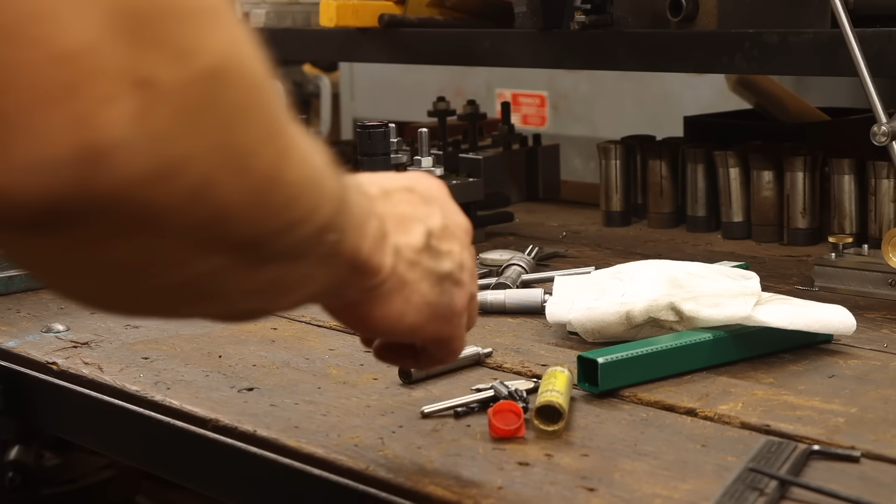Clutter is the absolute bane of my existence. Having stuff scattered about has the same effect as a persistent itch that just won't go away. It's obnoxiously distracting. After nearly a year of sorting, organizing, and labeling this shop, I have more or less eliminated all the clutter from my working areas, which makes this shop a real delight to work in. But now I've spoiled myself, and I want that clean simplicity in other areas of my life.

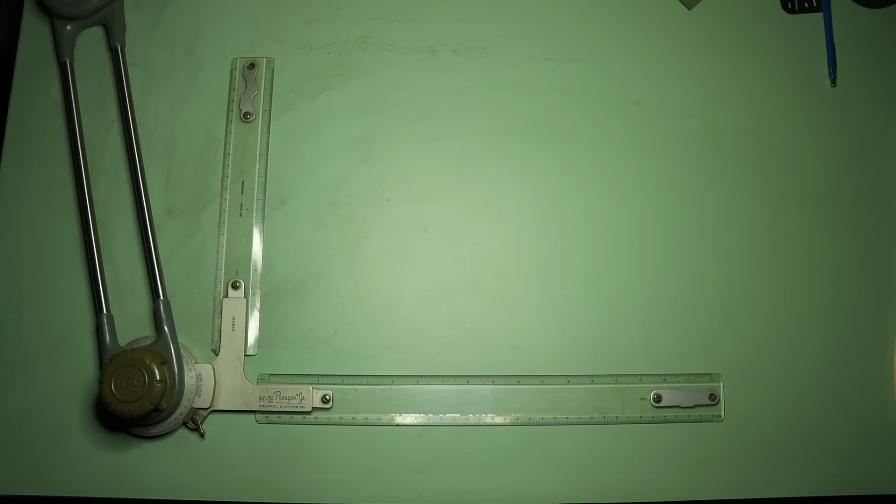Like any good machining project, I'll need a good drawing to go by. So let's jump right into the design. There are a lot of ways this build could go, but the only real requirement will be that it must fit the dimensions of a common credit card or ID.

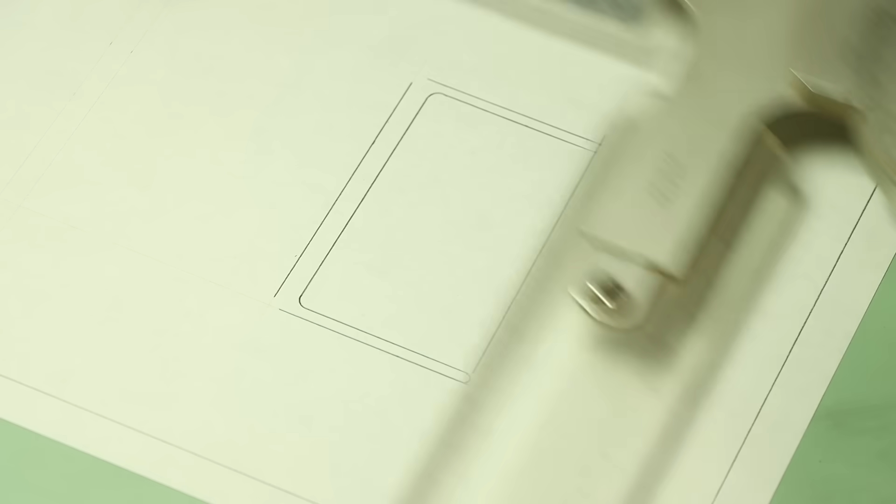I'm going to go for what I guess you could call a four-sided design, meaning the wallet will enclose 4 of the 6 sides of the cards, 3 edges and 1 face. So the outside dimensions will need to be a bit larger than the cards themselves to form the walls of the wallet. A holding capacity of a maximum of 5 cards should cover my needs, so that will define the depth of the card pocket and the overall thickness.

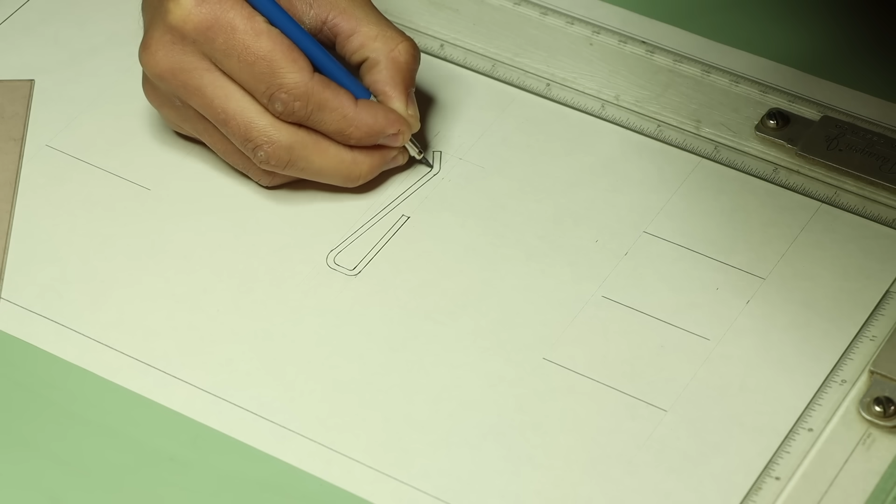To hold everything secure in the wallet, I'm going to include an integrated money clip. The springiness of the clip will keep the cards safely seated in the pocket, but also give flexibility to hold down a little cash. You know, just in case I stumble into some sort of machinist garage sale, or something.

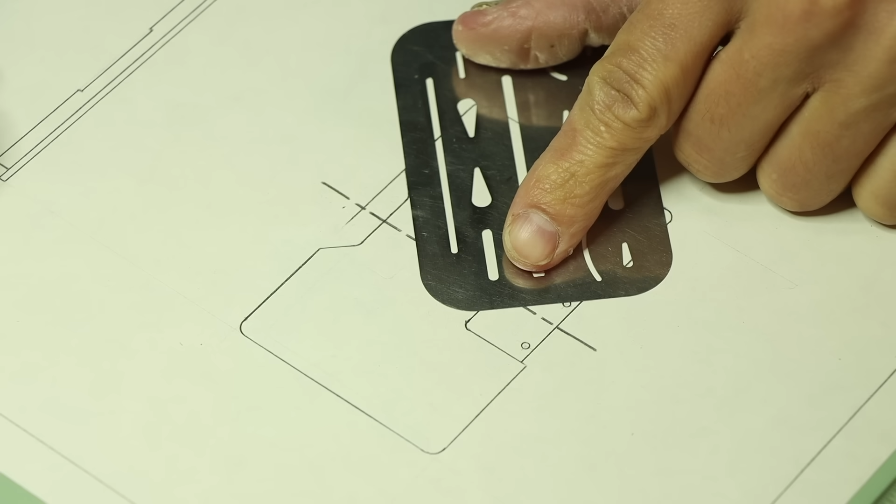The clip will wrap around the back side of the wallet, where I'll anchor it with some 2-56 button head screws. I'll remove the material where the clip is mounted to bring it flush with the outside surface and keep everything looking clean, and also add a little cutout to aid in grabbing the contents.

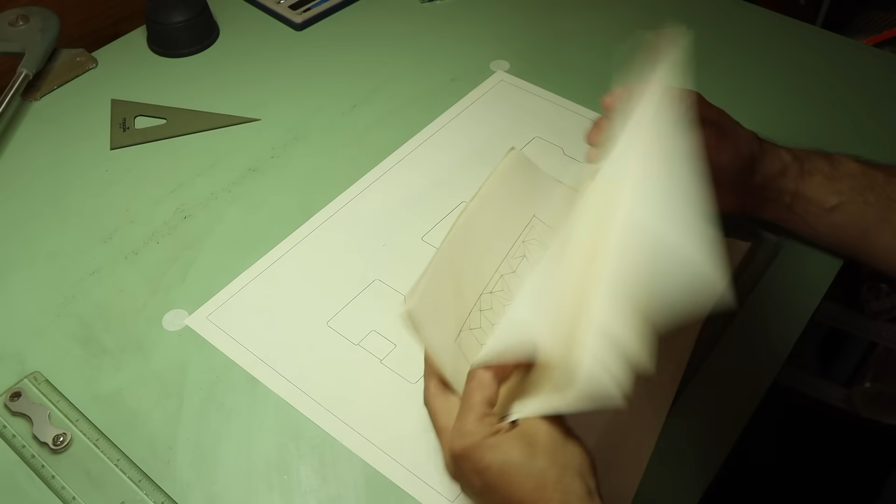With all the functional aspects covered, I can move on to the part I've really been looking forward to. I have this whole backside that is a literal canvas just begging for some creative expression. I'd like to engrave some sort of geometric pattern on here, but I'd also like for it to be a little bit of a challenge.

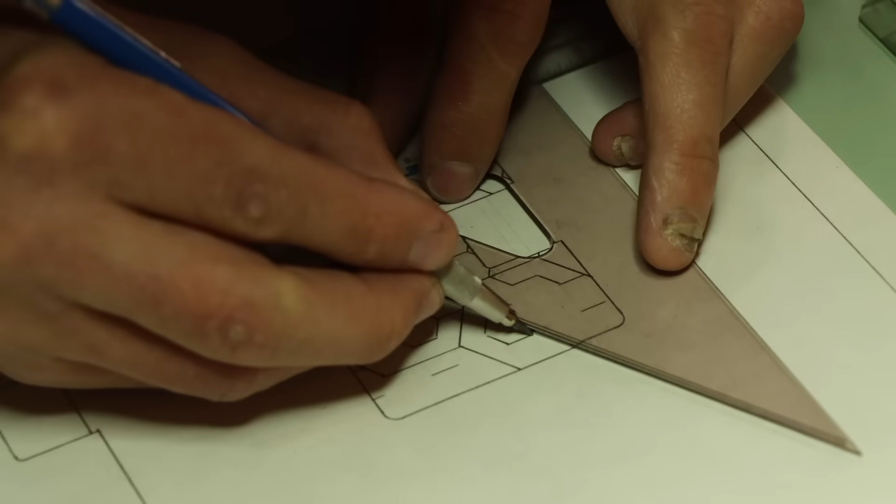After quite a bit of doodling and playing around with different concepts, I've settled on whatever you would call this. I don't know what it is, but I like it. And I think I'll be able to manage the machining with some clever dimensioning and fixturing.

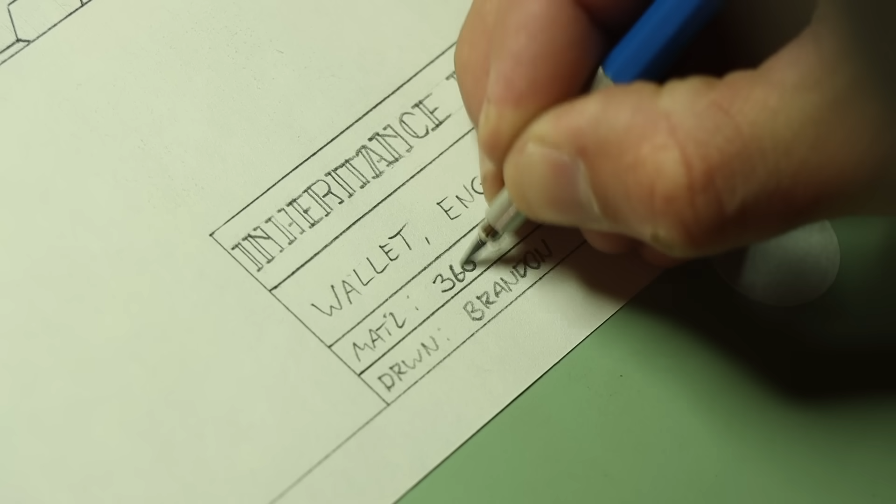I think. The setup I have in mind requires a fair bit of calculation ahead of time, as well as a couple changes in coordinate systems. I'll go over my thinking here when we tackle that part, but just know, it's not as bad as it looks. And since this is a project where looks will be important, material selection cannot be overlooked.

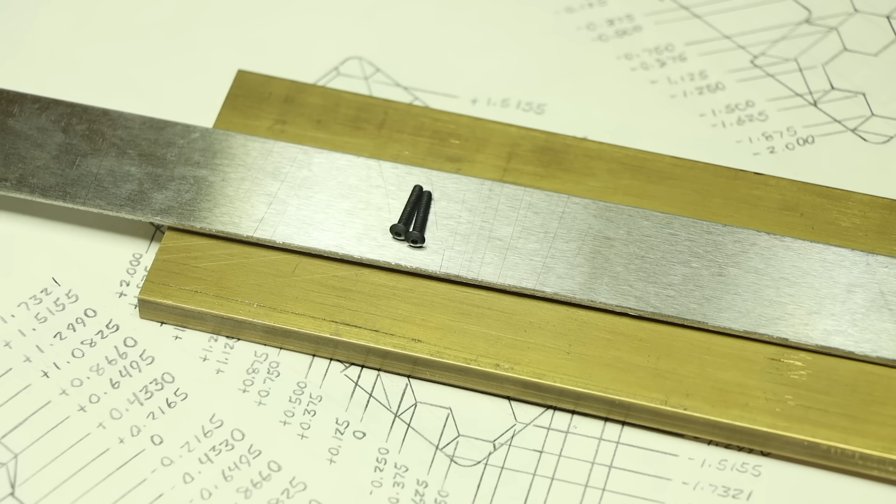I'm going to go with a 360 brass for the body and 304 stainless for the clip. I think the combination of the yellow, gray, and black of the hardware is going to look frickin' sharp, and I can't wait to get started.

Actually, I don't have to wait at all. It's time to machine. Just not on the project. There are a few things I need to get in line before I can really start. Some might even call these side projects.

The way I envision this going, I will be making heavy use of the rotary table. So first things first, I need to get this laid down and trammed square with the mill. I also expect to be bouncing back and forth between the rotary table and the vise, so I'll get this mounted and trammed as well. It's a little crowded, but I think this will work fine.

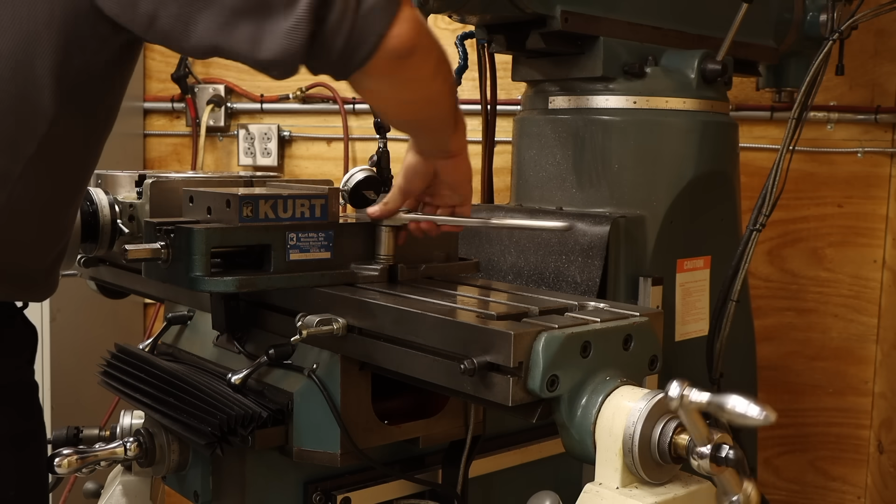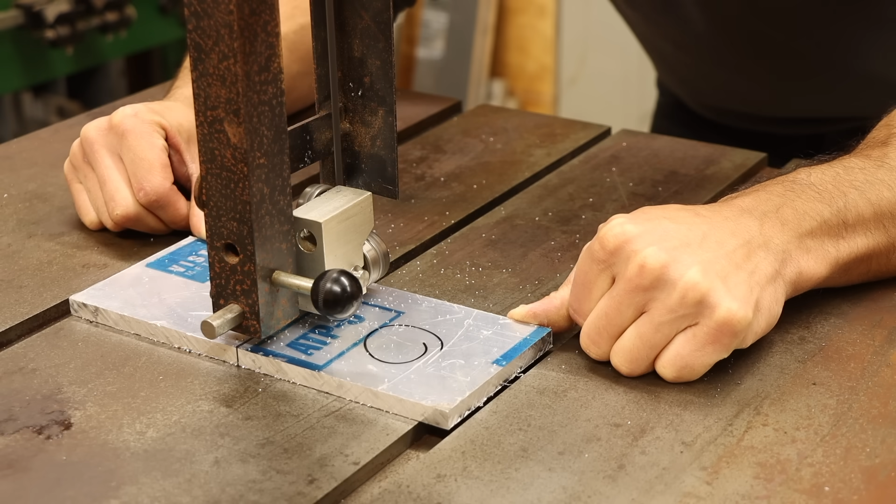Okay, now for stage 2. I'm going to need a way to accurately hold and locate the wallet at the center of the rotary table, which means I'll need a fixture plate. It just so happens that I have some 5083 aluminum tooling plate that would be perfect for this. My understanding is that this material has been stress relieved and precision ground, which should mean it will be very dimensionally stable during machining. Probably not absolutely necessary for what I'm doing here, but I've got it, so why not?

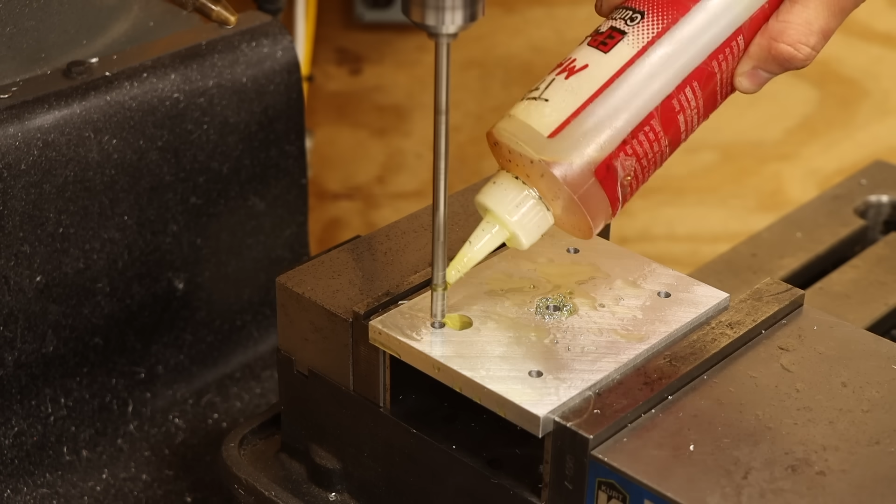After milling the sides all square, I can move on to drilling and reaming the various holes that will help me locate this plate on the rotary table. The locations of these holes will make sense shortly.

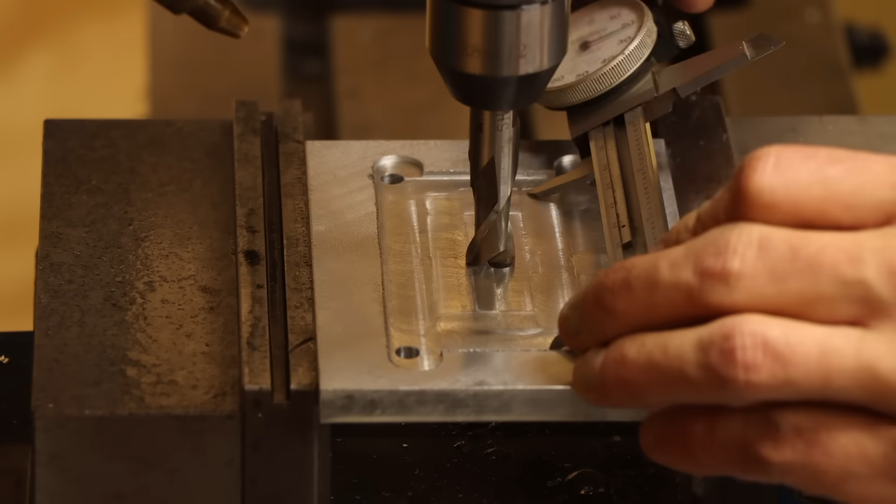Next, I can mill the pocket that will locate my brass blank. You'll notice the direction I'm milling as I cut the perimeter. This is in effect conventional milling and will prevent me from inadvertently overshooting my dimensions as the tool flexes. I'll hog the middle out with the climb milling method, and then skim the perimeter once more to take it to the final size. Then that takes care of the fixture plate.

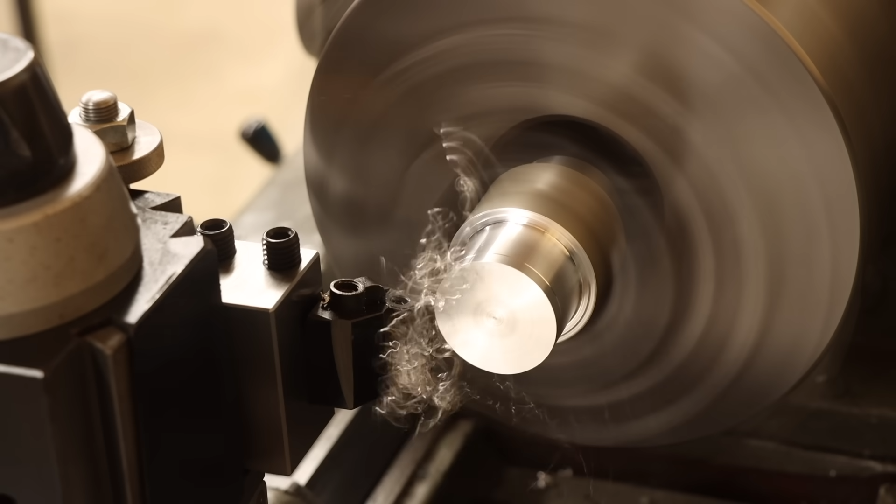Now I just need a way to locate this on the table itself. This will probably be the only lathe work I'll see on this project, so I'm going to cherish it while it lasts. I'll turn down the OD of the slug to match the bore of the table.

Then turn the end down further to a pin that matches the reamed holes in the fixture plate. After parting it off, I can flip this around, grabbing it by the pin and seating it against the chuck jaws so I can face it to length.

Then that's it on this machine. So long for now, my friend.

The pin is a perfect fit into the table, and the fixture plate is a perfect fit onto the pin. Maybe now I can actually get started on what I came here for.

I'll spare you the lengthy detail of preparing the brass blank, as it looks eerily similar to preparing the aluminum tooling plate. The only difference this time was that, in order to achieve a better surface finish, I side milled all 4 edges to dimension.

So, let's see how it fits. Absolutely no play at all with the fixture plate. Just as I hoped. Now the time has finally come that I can explain why all this setup is important.

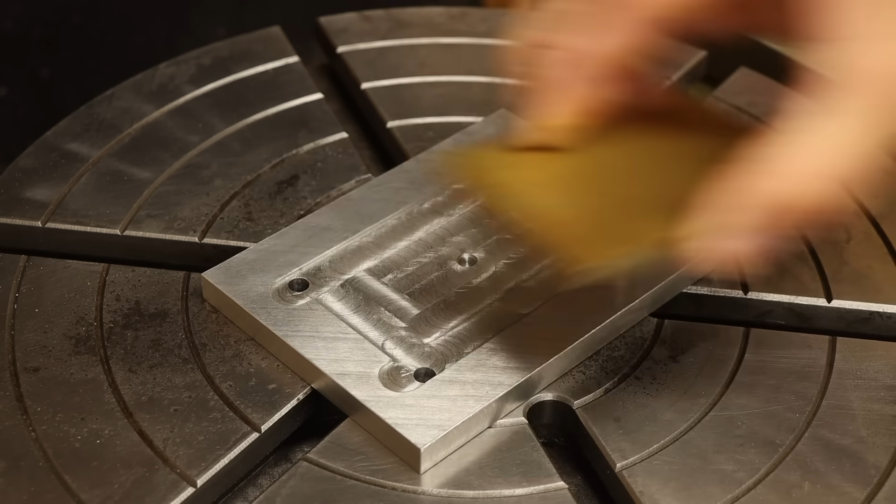This fixture plate will serve 2 purposes. One is to locate my brass blanks so that I can accurately cut all the corner fillets by spinning the rotary table, hence the holes near the perimeter. And second is to locate the brass blank about the central point of the engraved pattern.

By doing this, I can cut all the lines in one direction, rotate the table 60 degrees to cut the lines in the next direction, and so on. The central pivot hole isn't absolutely necessary for this, but it makes the math a heck of a lot easier to keep track of. Well, that is if it's in the right spot.

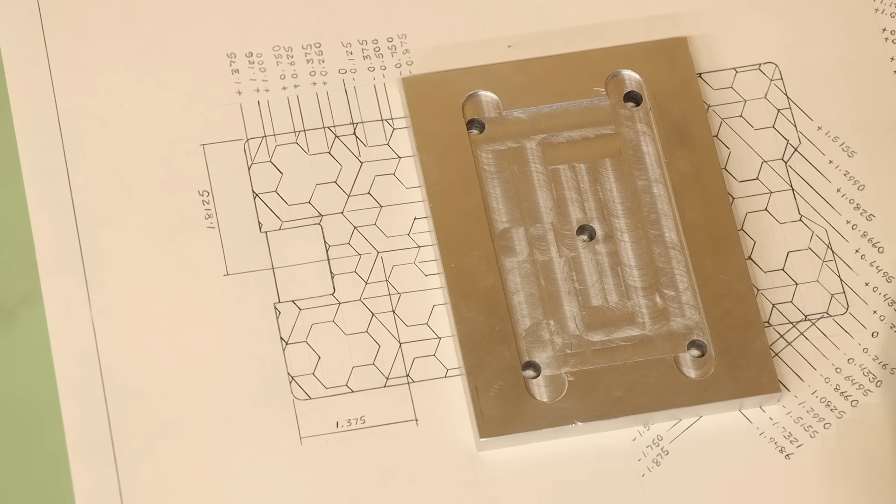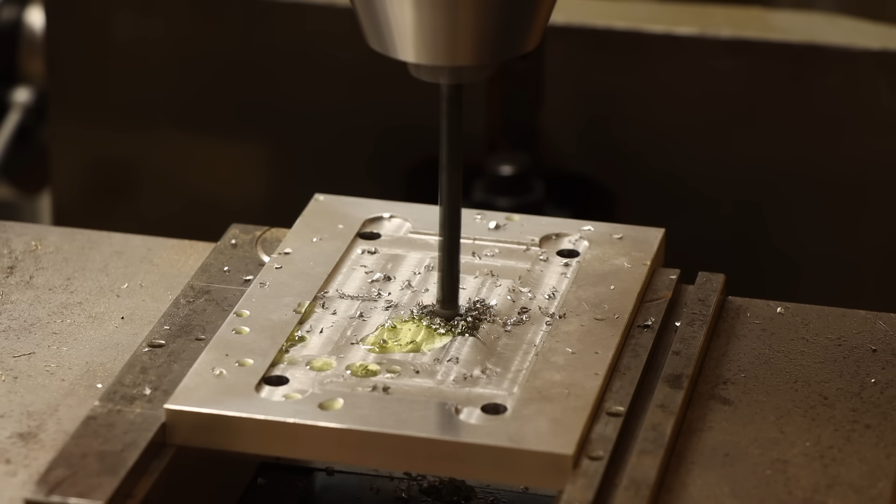I just noticed I have this hole in the wrong location. I guess that's what I get for not putting together a proper drawing for this thing. Yeah, this drill's not liking being that close to the first hole. I should have known that would happen.

Hopefully this end mill will salvage this hole. It's a little cattywampus, but as long as I favor it against the top right, it will work okay. Especially for a one-time use fixture like this.

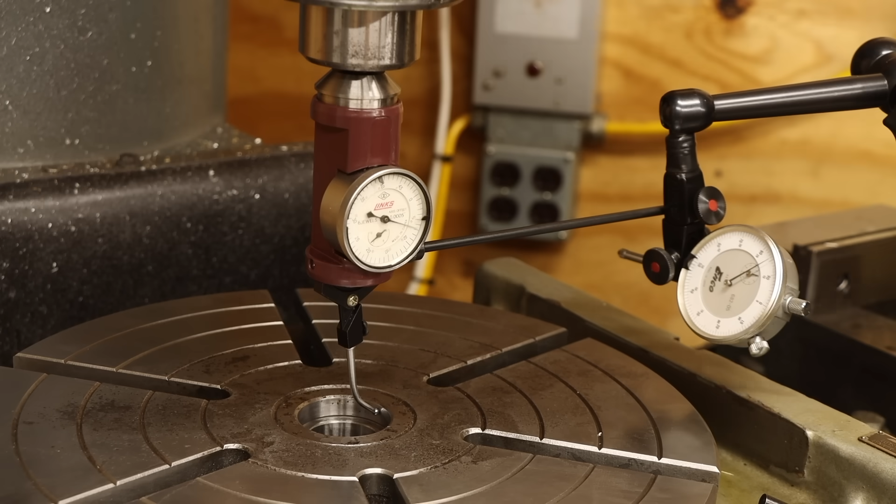Let's get everything in place. The first step is to locate the center of the rotary table with a coaxial indicator. And once there, zero both axes on the DRO.

Now I can position the fixture plate with the centering pin and use a combination square to align it with the table. And then clamp it down with the T-slot hardware.

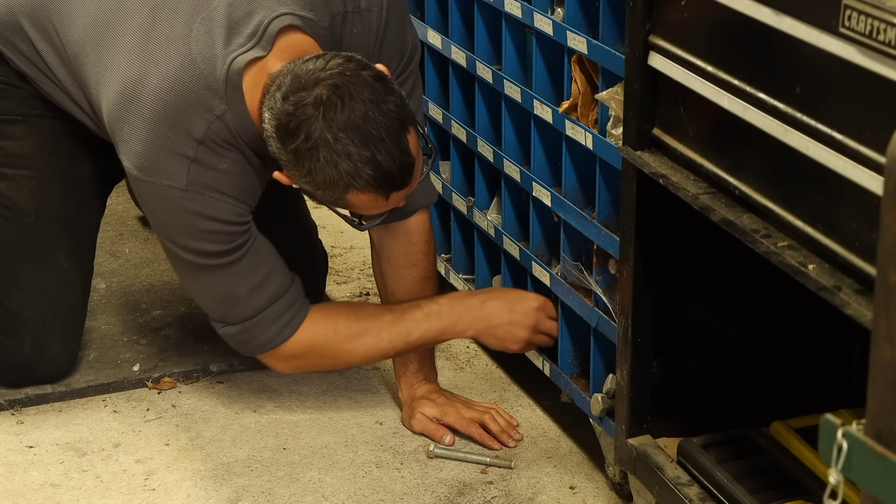Ugh, really? The shortest stud I have is, annoyingly, just slightly too long. These side projects are really coming in force today. At this rate, I might actually get to the meat of this build sometime next year.

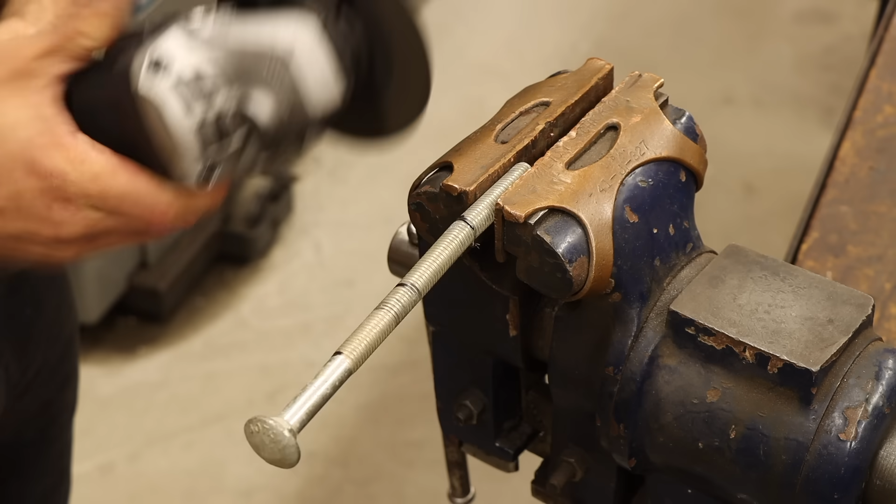I could cut some sheet stock to put under the clamp, but this isn't the first time I've run into this issue. Rather than kill more time on elaborate custom machined studs, I'll make this speedy and just lop off some lengths of some carriage bolts I found laying around. It's not pretty, but it works.

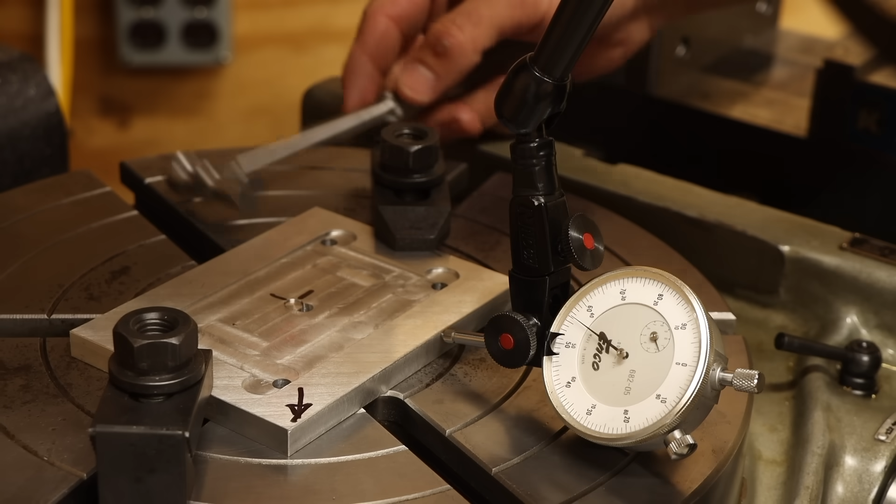Moving on. The combination square got my fixture plate pretty well aligned, but a lot is going to depend on the position of this plate. To get it as close as possible, I'll set up the dial indicator and tap it in the rest of the way while sweeping the front face.

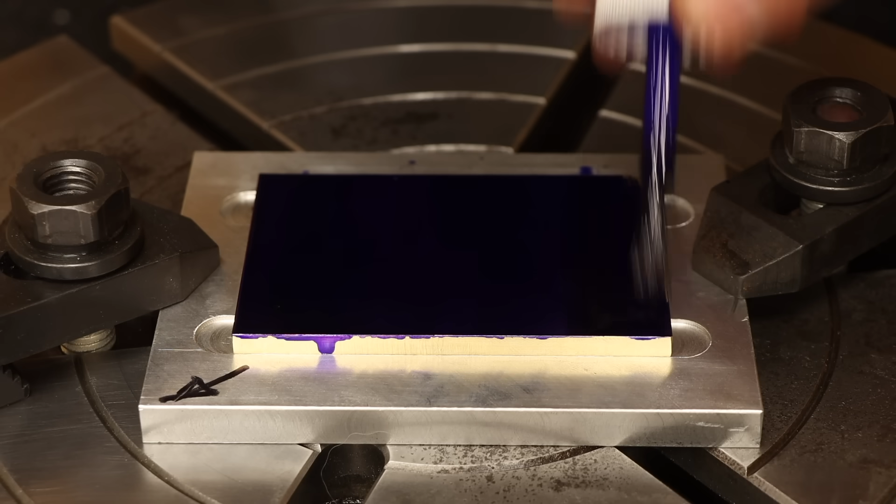I'm going to start engraving and there will be a metric ton of lines to keep track of, so I'll keep the drawing nearby, and to make it just a little bit easier to see, I'll coat the plate in some layout fluid before clamping it down.

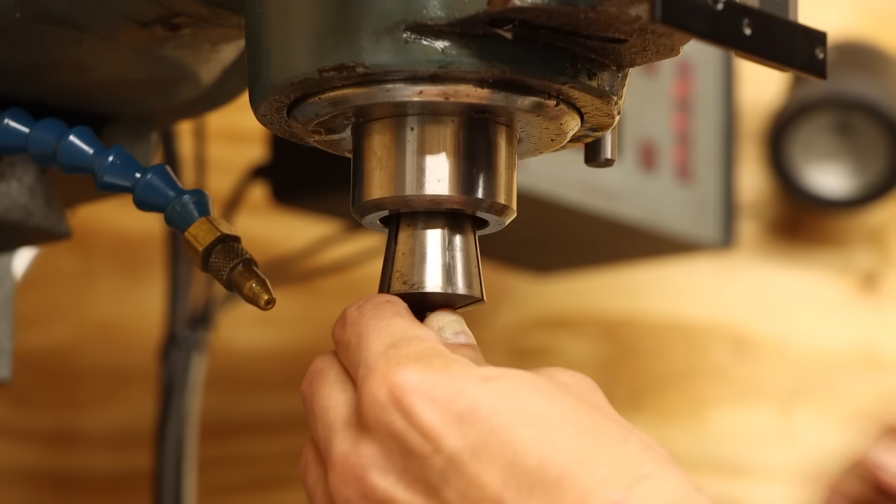The engraving bit I ordered is a 60-degree single flute with a 15 thou radius. Based on the proper speeds and feeds for brass, I should be running this in excess of 15,000 RPM, which just isn't happening on this mill. I'll run it as fast as I can though and hope for the best.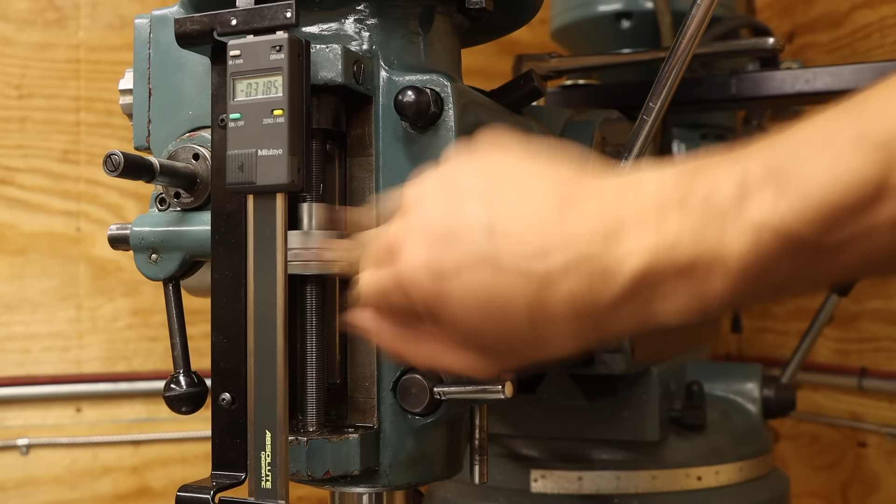I'll set the quill stop for a 10 thou depth of cut and I think that's it. Time to actually do this.

Well, that first pass looks beautiful, especially with the gold against the blue. I have a feeling this is going to be very visually stimulating, so let's keep going.

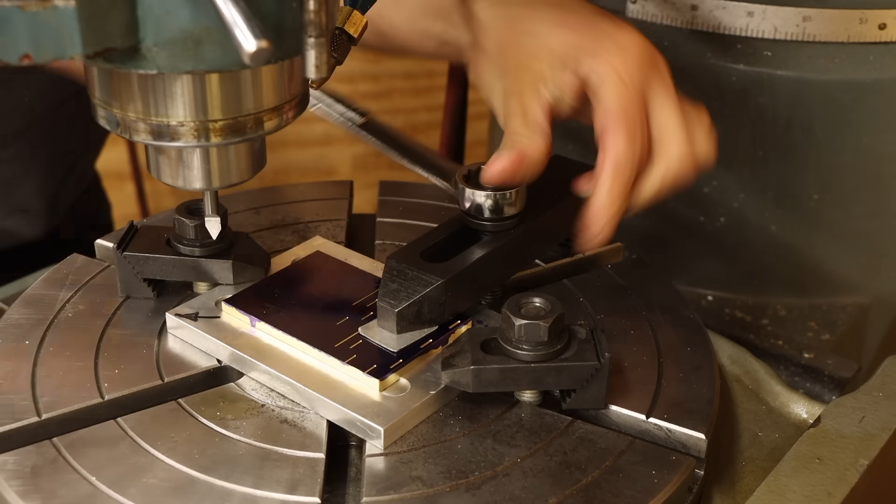I'll index the table to the left and start the process of cutting all the vertical lines. It's not super easy to follow the pattern at this point, but it should start to reveal itself soon. Once I clear the right side of the part, I can reposition the clamp. Then start on the left side and work my way back to the center.

That already looks so cool, and I'm only a third of the way complete. To cut the next set of lines, I'll rotate the table 60 degrees, then start working my way across the plate once again. At this point, I'm rapidly becoming thankful for the math I put into this hex pattern ahead of time.

I knew most of my hand wheel movements were going to be in the y-axis, so I sized the geometry such that all my start and stop locations end up being even numbers, making this a heck of a lot easier to keep track of.

After rotating the table another 60 degrees to cut the final set of lines, the pattern suddenly starts to emerge. It really is satisfying how, as I start and stop each segment, the vertices of all 3 coordinate systems just line up perfectly, and it's highlighted even more by the beautiful golden pattern shining through the royal blue surface.

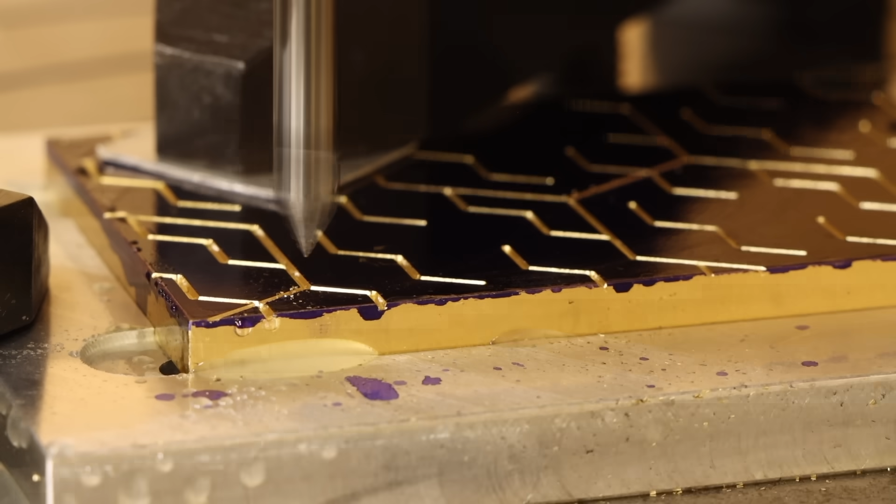After 2 hours of engraving, the pattern is complete. 1 second.

As I was saying, after 2 hours and 2 minutes, the pattern is complete. And it already looks spectacular.

Part of me wishes I could somehow keep this blue, but I have a feeling it will look even better all gold. Before dismounting this part though, I have a couple more operations to do in this setup.

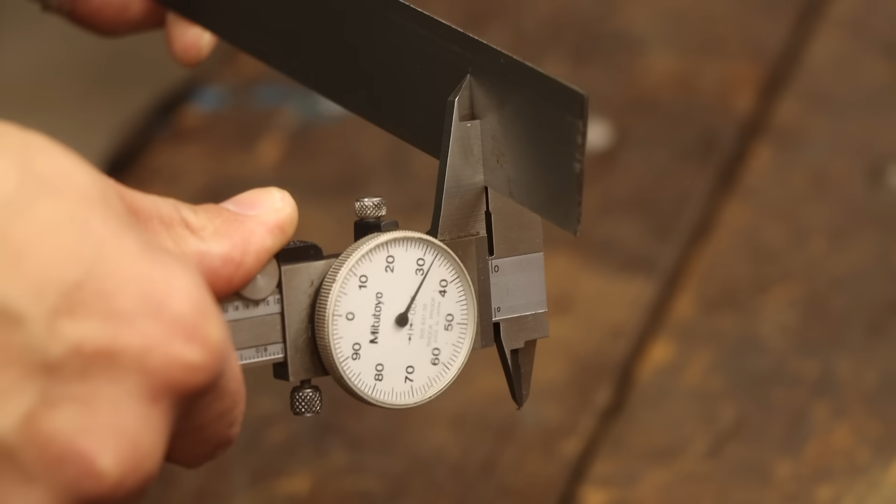I still need to cut the mounting pocket for the money clip. The brushed stainless steel stock I had on hand was about a 32nd of an inch thick, so that will define the depth of the mounting pocket.

With the rotary table turned back to 0 degrees, I can hog out this section, again using the climb milling method around the perimeter, and then conventional milling away the middle material. That actually looks pretty cool.

Shame it'll be covered up when I install the clip, but at least I'll know it's there. The money clip is attached with two number 2-56 screws, so I'll go ahead and drill the pilot holes for these while I'm here, and then that's it for this side.

While I still think the blue-gold contrast looks very cool, I'm super interested to see what it looks like underneath. Oh yeah, that's just sick. I'm really starting to get excited to see this thing complete, so let's keep trucking along.

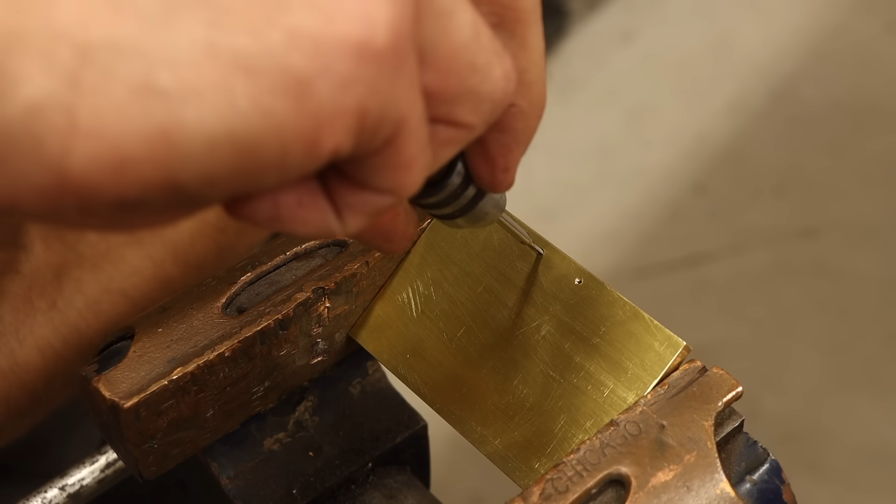The 2-56 screws that attach the clip are minuscule by some standards, and of course the tap is equally as tiny. So I have to be extra delicate while cutting these threads.

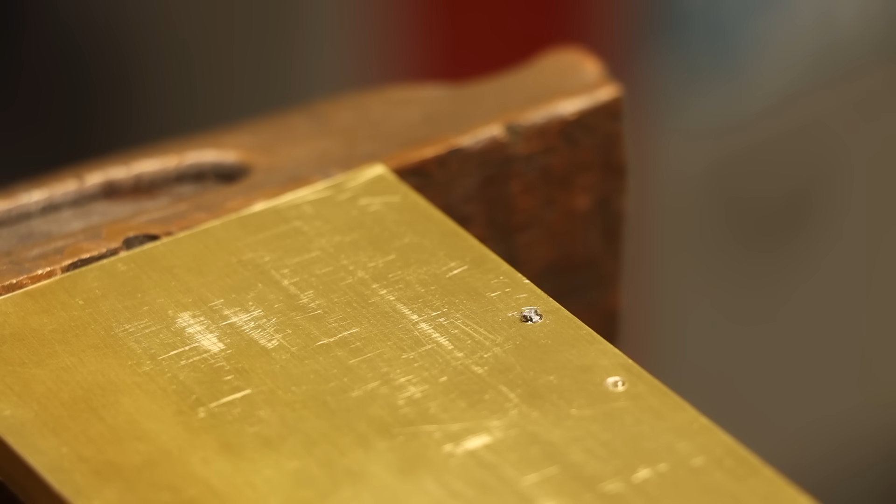That was not delicate. In a strange twist of fate, just as I was thinking I created a whole lot more work for myself, I noticed the tap broke off slightly above the surface of the brass, leaving just enough for me to grip onto with some needle nose pliers. What a small but huge blessing.

Alright muscles, let's try this again, but remember, turn it down a notch. There you go. Good save.

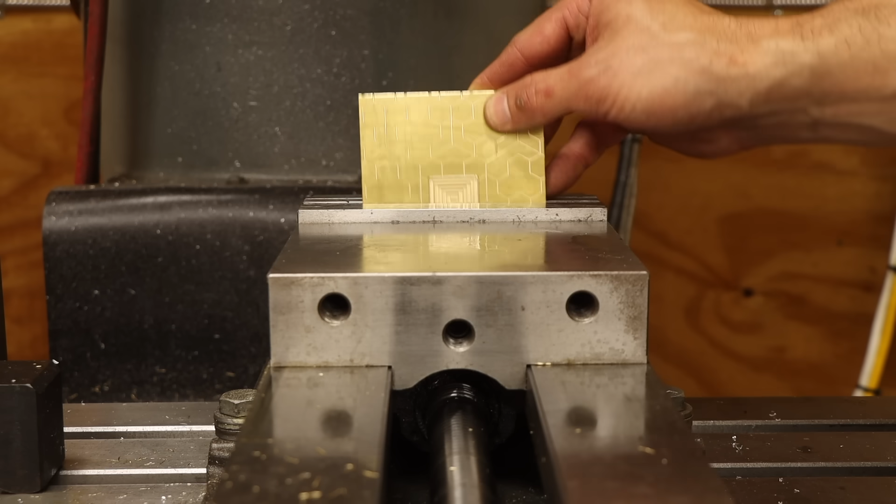Back to the mill. Next are a couple edge operations in the vise. To cut the finger relief whatchamacallit, I'm using this insert chamfer mill.

I find myself using and designing around this tool in many of my projects, and I think it's because it has the ability to kill two birds with one stone. It mills and chamfers simultaneously, leaving a seamless result.

Flipping the part 180 degrees in the vise, I can mill the edge relief for the money clip. Then it's back to the rotary table.

This time pattern side down, so I can start hogging out the bulk of the material to form the card pocket. Once again, like all the previous pocket milling operations, I'm starting with the perimeter in a climb milling fashion.

Then working my way towards the center as I remove the remaining material in a conventional milling manner. And yes, I did calculate the coordinates of each pass so I could produce a nice symmetric surface pattern. I know it's not going to be visible, but that doesn't mean it can't look good in hiding.

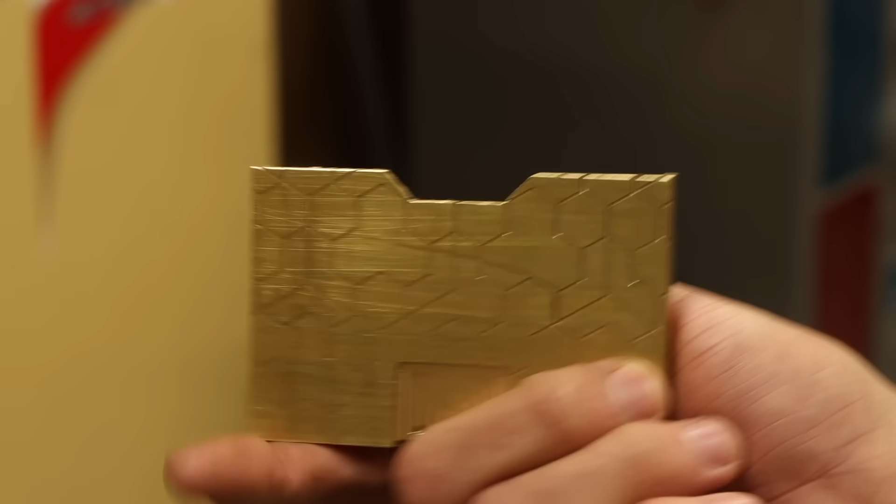After also milling the final clip relief, I can dismount this and start on the next setup. Well, actually, that's not looking so good now that I'm seeing it up close. The finish is nice around the edges, but it really starts to get gnarly in the middle.

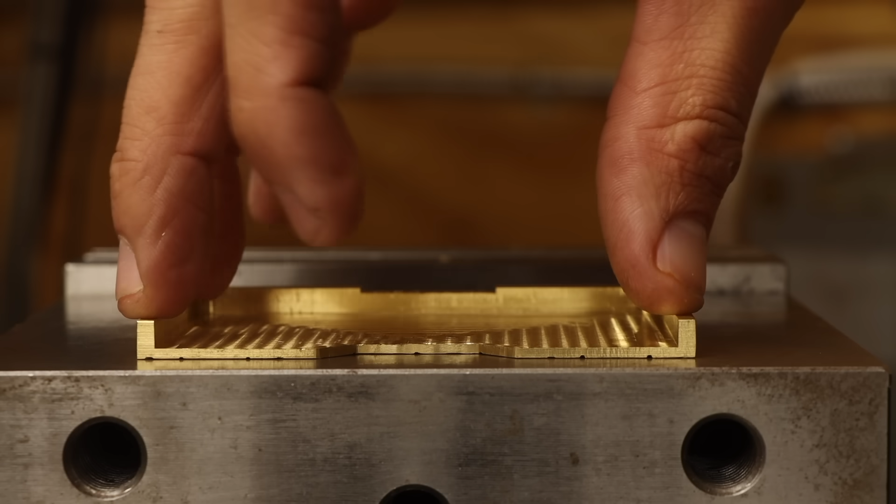I think I know what's going on here though. As I milled closer and closer to the center, my supporting material got weaker and weaker, allowing it to succumb to the forces of the end mill. I seem to have overlooked the first three rules of machining: rigidity, rigidity, and rigidity.

On the bright side, I have some extra thickness to play with here, so I'll set this back up and take another 10 thou off the depth of the pocket. This time around holding the middle down until I run out of clamp clearance, then repositioning the clamps from the outside and supporting as close as possible to the center while I finish it out.

If I were to do this again, the solution would be to start in the middle and work my way out to the edges.

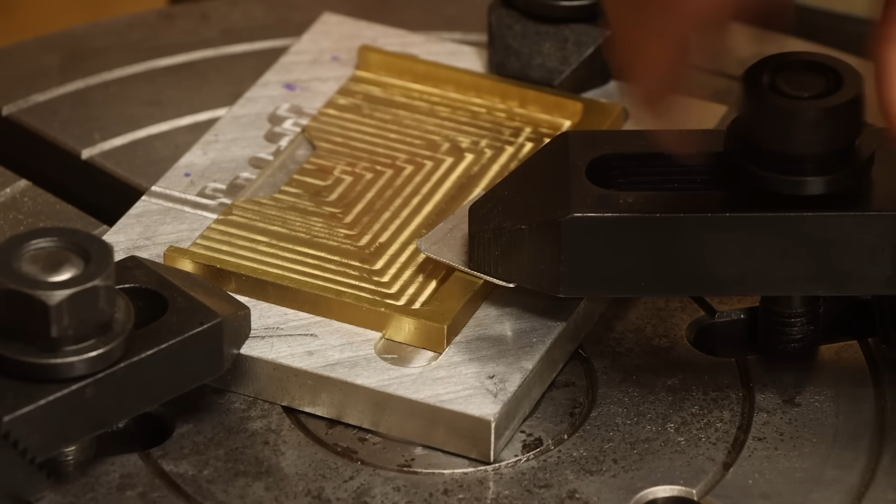Alright, that's more like it. That brings me to the final bit of machining on this part: the fillets. As I mentioned before, that's what these other holes in the fixture plate are for. So I'll get this set up around one of the lower holes and true it up to the table using a combination square like before. But this time I'll skip the precision indicating—I think this will be more than accurate enough for these small cosmetic features.

After clamping the part in the fixture, I can bring the end mill in until it's just nearly touching the edge, then sweep the rotary table through a 90-degree rotation to cut a nice little fillet. Yup, that's about as good as I could have hoped for.

From here I can start flipping and milling the remaining three corners. I realize how silly it is to be using this massive 12-inch rotary table to cut a meager 1/8-inch radius fillet. Talk about overkill. But it's what I have, and it gets the job done.

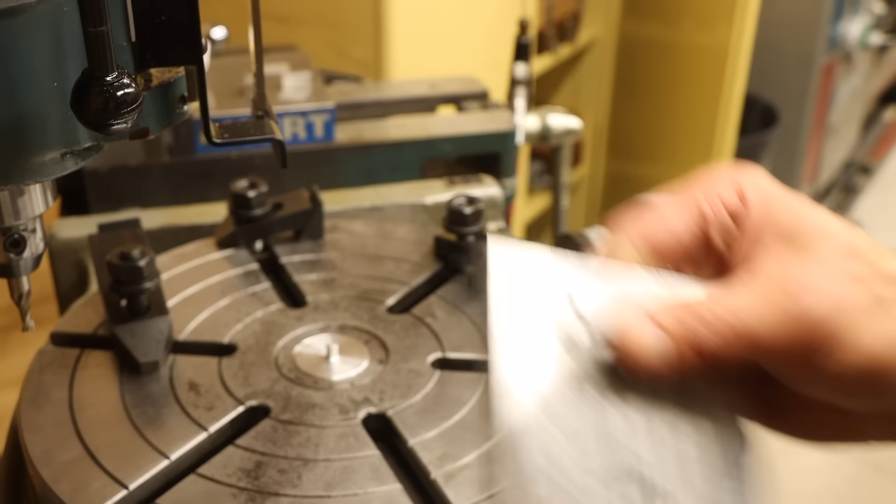There are still two more fillets to take care of on the ends of the sidewalls, and that's what the final two fixture plate holes are for. I'll get this set up in the same manner as before, then bring the end mill in and sweep the table through a 180-degree rotation this time to form these as well.

And as luck would have it, on the very last operation, I ended up just barely touching the finish on one side. While I'm not thrilled about this, it will be mostly hidden behind the contents of the wallet, so I'm going to make one small exception and let it slide. Other than that, this is looking great.

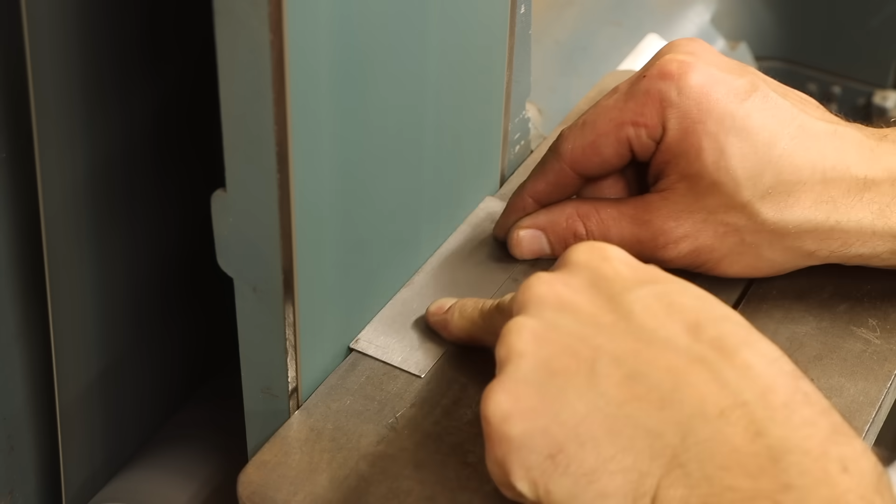But at this point, it's nothing more than a fancy piece of brass. It won't be very useful without the second piece of the puzzle, the clip. I'll start by chopping the brushed stainless stock I have down to a more manageable size, then make this narrower with the belt grinder until it's a consistent dimension and a nice fit in the pocket of the brass body.

To match the internal fillets, I'll loosely grind these on the belt grinder as well, but then switch to some emery cloth for the finer radius work until it's a dead match.

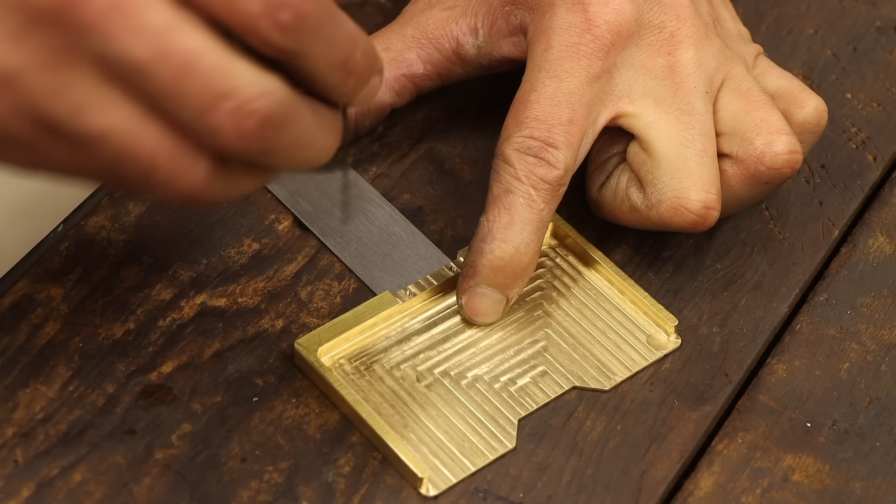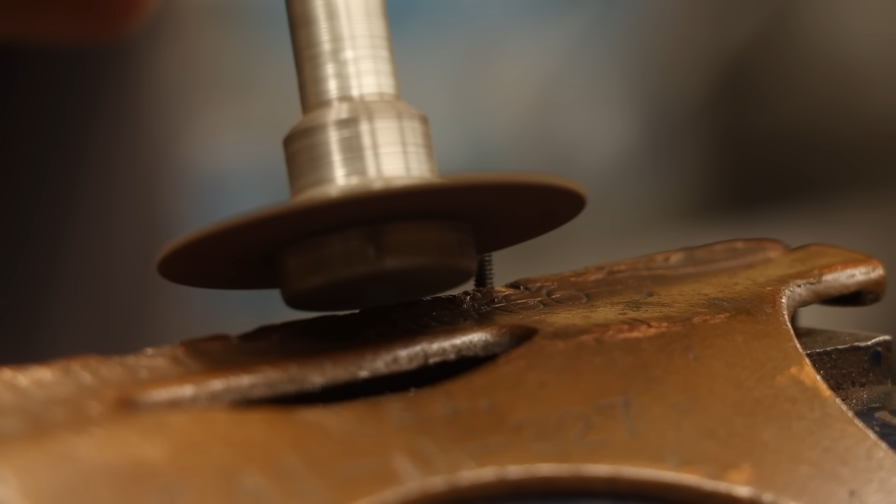Beautiful. With the clip in position, I'll transfer the two mounting hole locations with a small drill bit, center punch the faint scribings left behind, and finally drill the two clearance holes. The only 2-56 screws I have on hand are much longer than I need, so I'll carefully trim these down with a die grinder, and then put this all together.

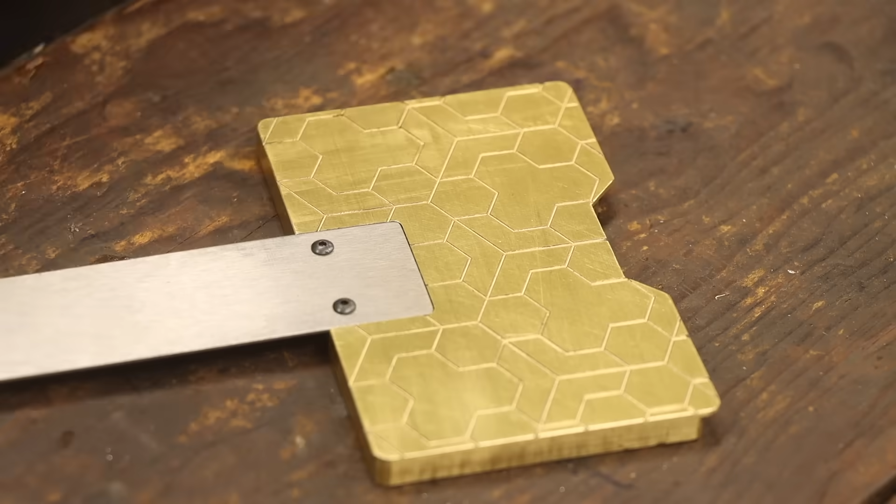Oh yeah, I'm really liking where this is going. I originally had plans to come up with some clever fixture for bending the clip into its final shape, but then I realized I already have the perfect fixture made—I can bend this over while mounted right here to the wallet body.

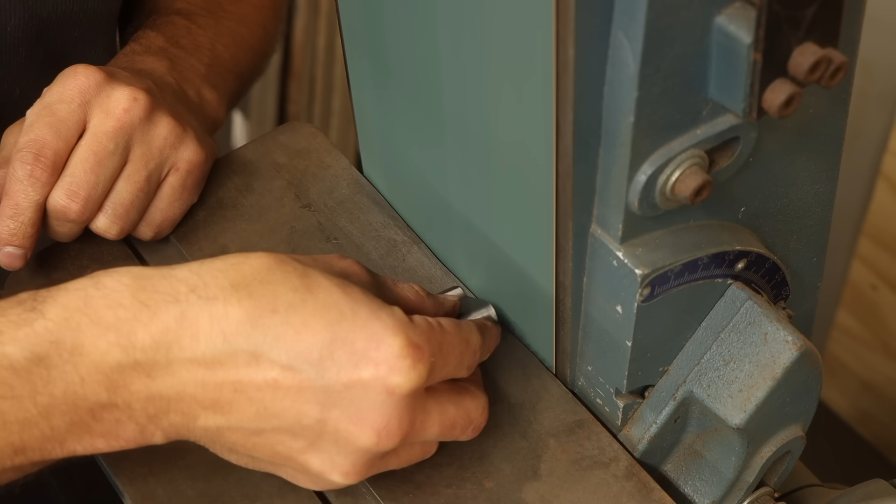Then, setting this up in the vise, I can use a soft hammer and punches to bring the back of the clip flush with the wallet. The top side of the clip gets a more gradual bend that I can form by wrapping around the shaft of a transfer punch. Then the final upward bend at the end of the clip is formed in a similar manner. I'll chop the excess length off the end and grind a nice radius on the leading edge.

Then put the final touches on it with some emery cloth, and while I'm at it, do the finish sanding on the brass body as well. Alright, let's put this bad boy together.

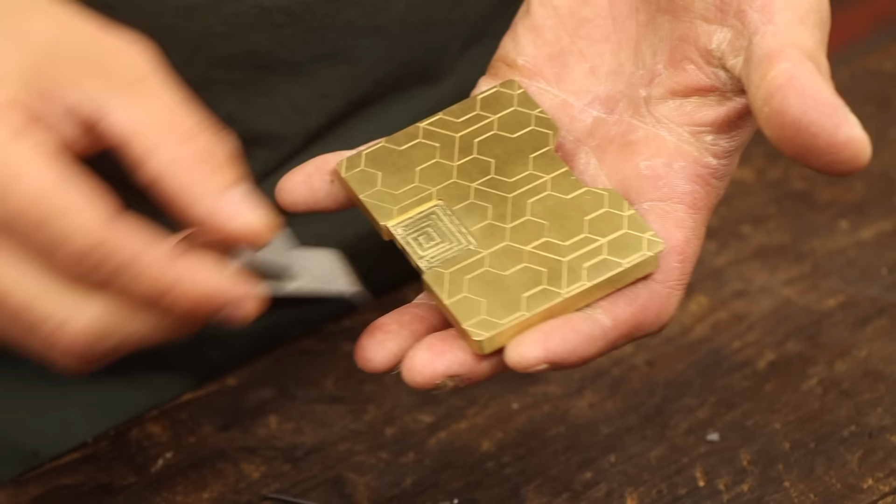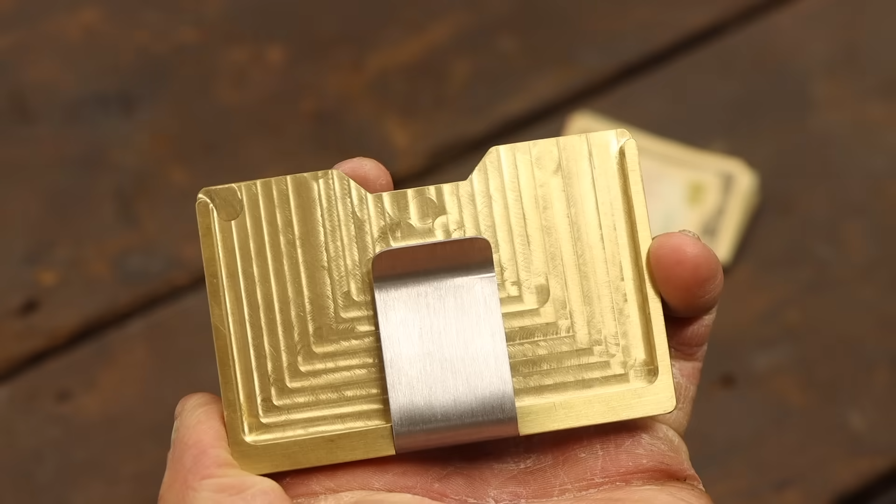Oh yeah, that looks freaking nice. But how does it work? Perfectly, that's how. Easily has capacity for 5 cards, plus a little extra room for cash. And it's all held quite securely.

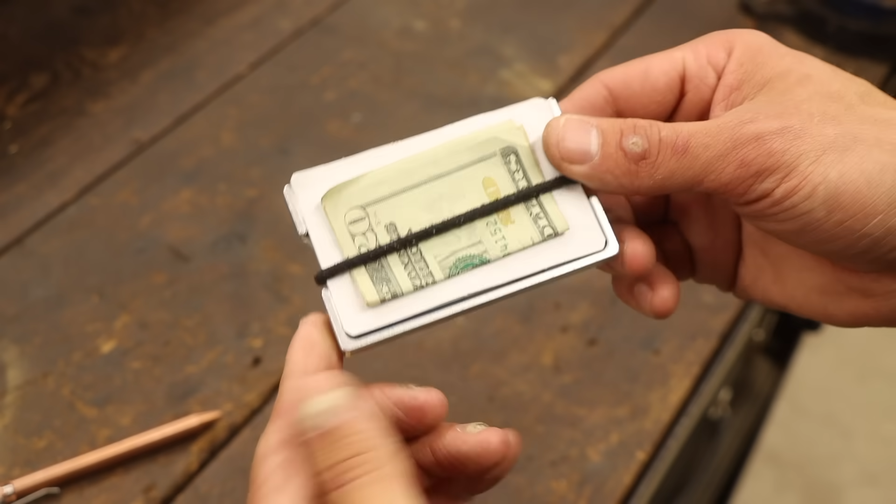Excellent. Now, it's time I let you in on a little secret I've been keeping. I actually already have a low-profile wallet—my wife got me this one years ago as a college graduation present. And while an upgrade isn't off the table, I didn't make this one for myself. I actually made it for my brother. It's just missing one last detail.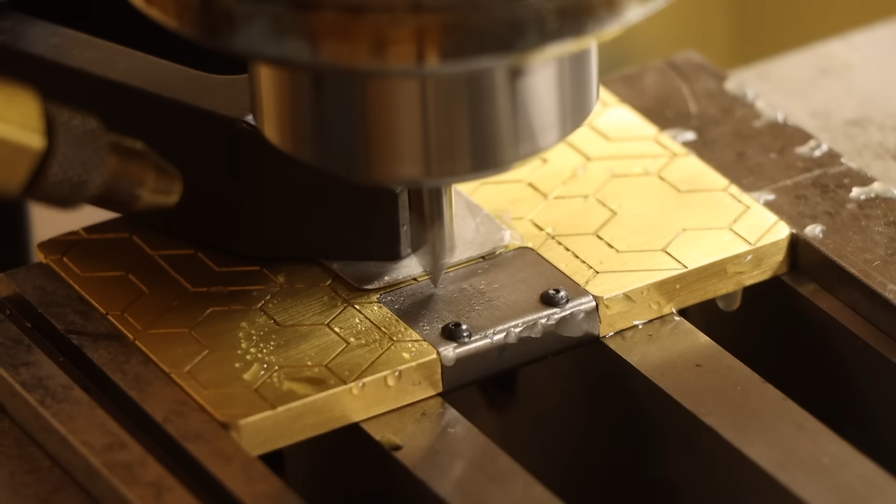Perfect. So if you're watching this, Jake, happy early birthday.

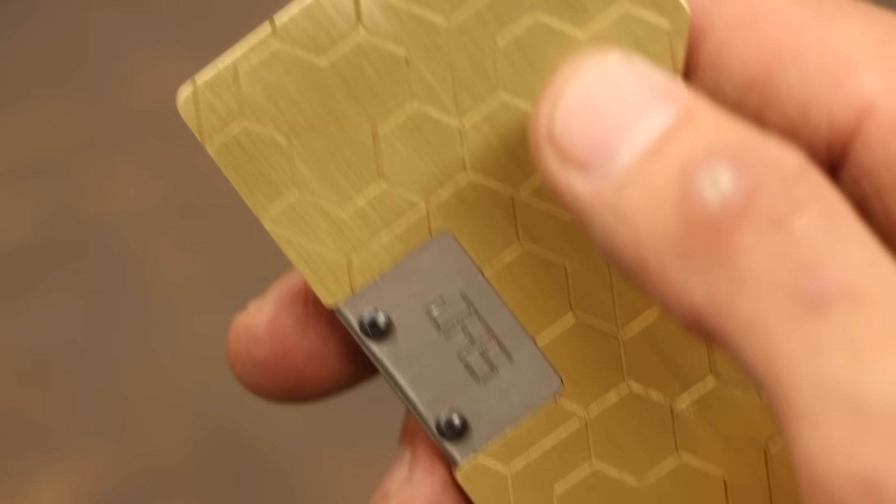Now that's truly it for this wallet. I'm so pleased with how it turned out. The combination of the yellow brass, silver steel, and black screws just looks so good together, and the pattern looks really sharp without being too much. Not everything in life has to be completely minimal, but having a simple, clean, good-looking wallet is a real treat for anyone looking to streamline a bit. And I hope my brother enjoys this one for years to come.